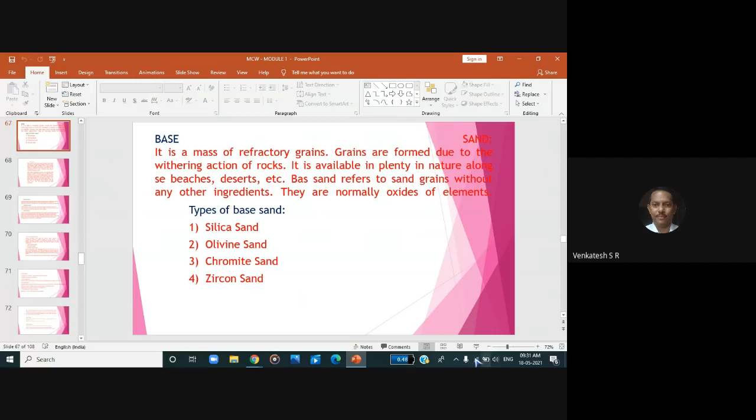See, the riverbed sand, if you add clay and moisture, meaning water, to the riverbed sand, then it becomes green sand. Next, dry sand: as the sand directly coming from the riverbed, that's called dry sand.

Next, no bake sand mold. All of you have heard of phenol formaldehyde, a chemical solution supplied by the Foseco company, the only company throughout the world that supplies this phenol formaldehyde solution.

If you add the phenol formaldehyde solution to the dry sand, it becomes no bake sand. After mixing the solution with the sand, apply it in the mold box and make the mold within 2 or 3 minutes, otherwise the sand becomes just like a rock. In a few minutes, the sand particles bond together and form a rock-like structure; if you touch it with bare fingers, you feel like touching rock.

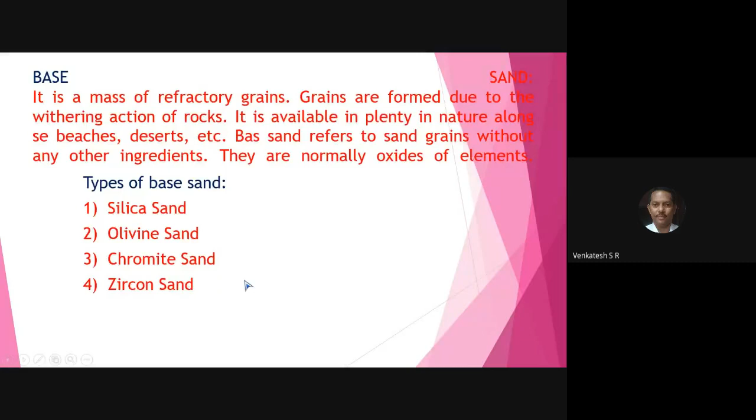Once again write down the title, types of base sand, underline it, put a colon. Below that write down: number 1, silica sand; number 2, olivine sand; number 3, chromite sand; number 4, zircon sand. This is the explanation for silica sand, olivine sand, chromite sand, and zircon sand.

Next, come to the point: how many types of sand molds are available? Write down types of sand molds, underline it, put a colon. Below that write down: number 1, green sand mold; number 2, dry sand mold; number 3, no bake sand mold.

The green sand mold, as observed in the explanation, contains silica sand, clay, and water. If required, additives and binders are added to the green sand.

Next, advantages of green sand: the cost is less, it's suitable for ferrous and non-ferrous castings, strength is high, you can produce a large number of castings, and you can produce thin and intricate shapes.

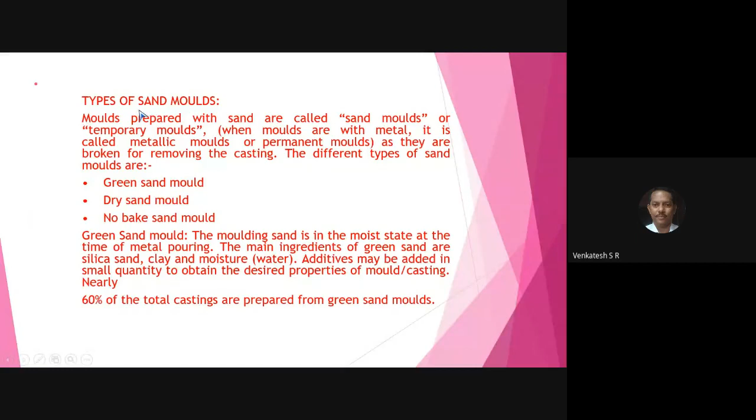Remember, the green sand mold is directly produced from silica sand, clay, and moisture. But the dry sand mold is placed inside the furnace for about 6 to 12 hours at 200 to 300 degrees centigrade. The advantage is the dry sand mold is stronger than the green sand mold.

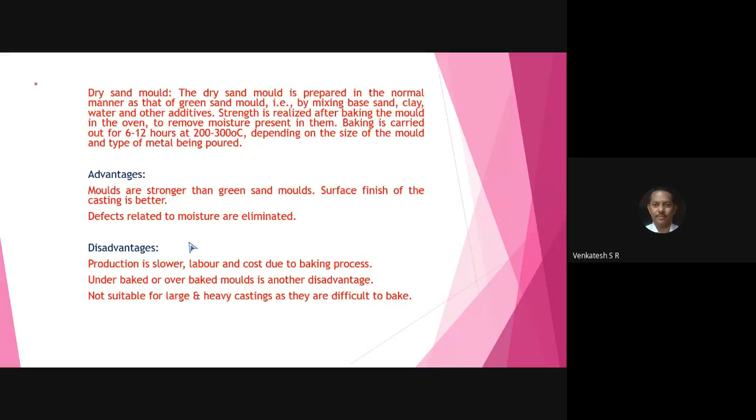Next, the no bake sand molds. 'No bake' means heating the mold in the furnace is not required. Usually a binder resin type is added to the sand.

That is called the hardener, which is phenol formaldehyde solution. All of you please write down 'no bake sand molds' and underline it. After that, write 'hardener', put a hyphen, and write 'phenol formaldehyde solution' as the hardener.

No bake sands are produced using base sand, binder, hardener, and catalyst. All of you write down: first hardener, binder, catalyst, and base sand.

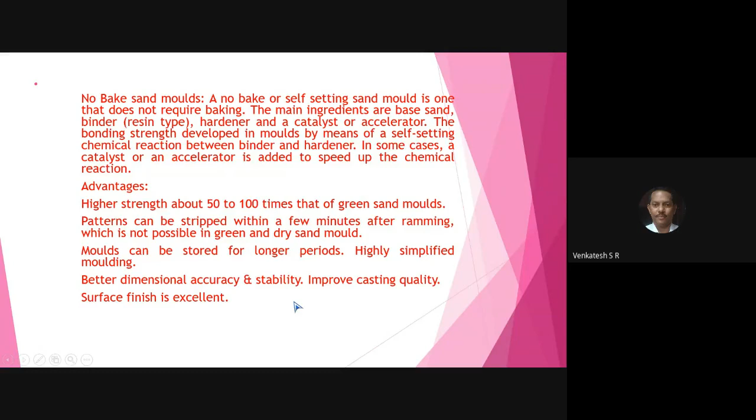The disadvantages: first, once you open the container of chemicals, you have to use it within half an hour, otherwise it becomes hard. Next, the phenol formaldehyde solution is very costly.

Just imagine, 1 liter of phenol formaldehyde solution costs 1,200 rupees. And it produces some odor and gas. If it is mixed with the sand, a reaction takes place producing gases and odor, which is dangerous to the operator or the man who makes the mold.

Sometimes breaking of the mold takes place. If you keep the mold for a longer period, cracks will appear. That is the brittleness usually present in no bake sand molds.

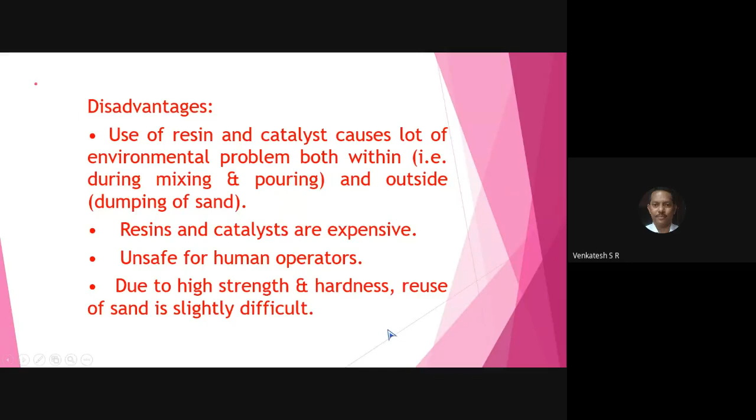Next, molding sand mixture ingredients for different sand mixtures. The ingredients used for the green sand mixture are base sand and binder, bentonite. Bentonite is nothing but clay.

All of you write down bentonite, in bracket write clay binder. Usually the clay binder is added to the green sand with a percentage of 6 to 12%. Write down: bentonite 6 to 12%, plus water 3 to 5%.

Plus remaining green sand. And sometimes next write down additives. The additives are usually used in green sand mold: coal, silica flour, the fine powder of silica flour.

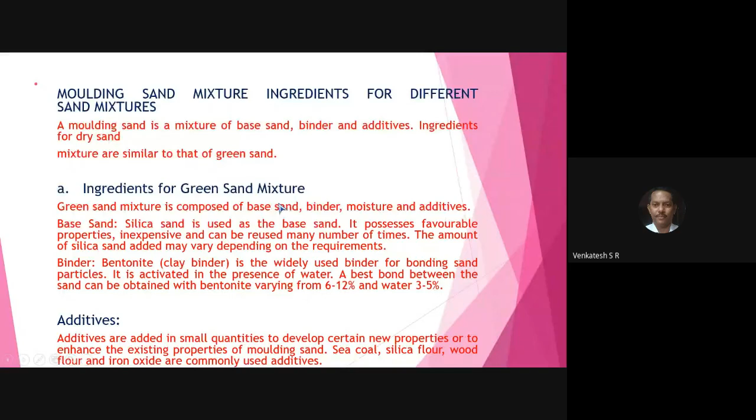For that, make subdivision A, write the title 'Ingredients for green sand mixture'. Next, write number subdivision B, 'Ingredients for no bake sand mixture'.

Underline that. First write down base sand, colon, silica sand, plus sodium silicate binder.

The alkyd binder system consists of 3 parts. At the top write down binder, underline that. The alkyd binder system consists of 3 parts. Below that write down Part A binder, put a hyphen, sodium silicate.

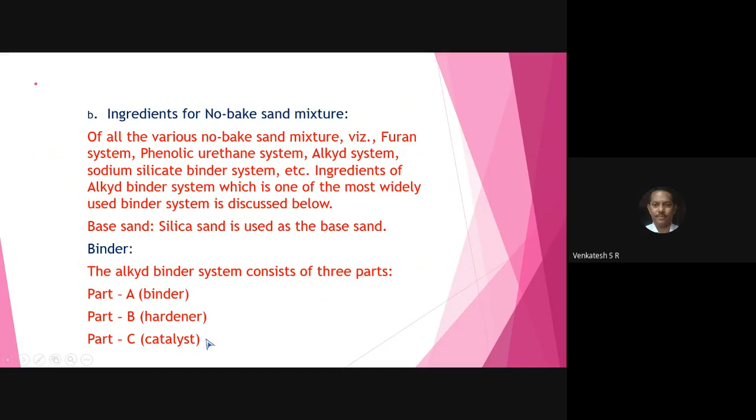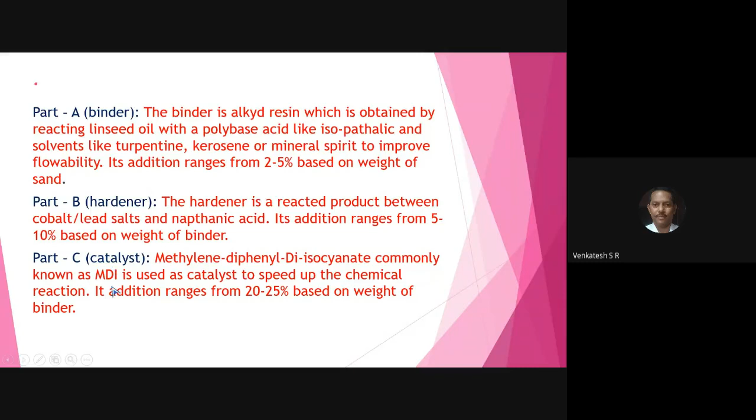Next, come to the point. All of you write down methods used for sand molding, or you can write down different types of sand molding. Write down methods used for sand molding, and underline that.

First, write down bench molding. The name itself indicates bench. In our college foundry, we carry out the mold making process on the bench, made from a concrete slab at a height of 2 to 2.5 feet, with a slab of 2 feet by 5 feet length. On that, they carry out the molding process - that is called bench molding.

Next, floor molding. The molding process is carried out on the floor. The name itself indicates the process is carried out on the floor - it is called floor molding.

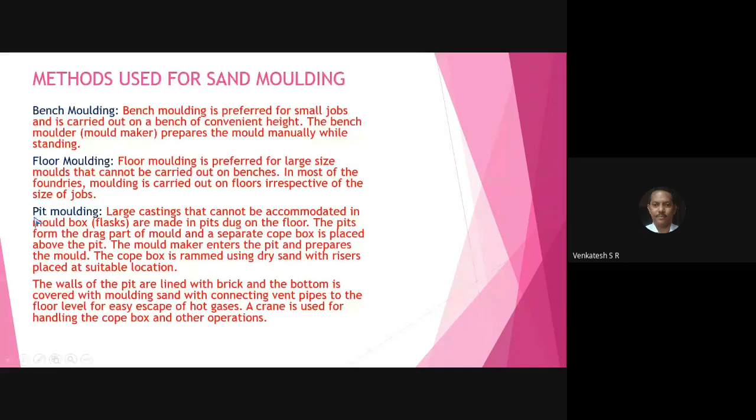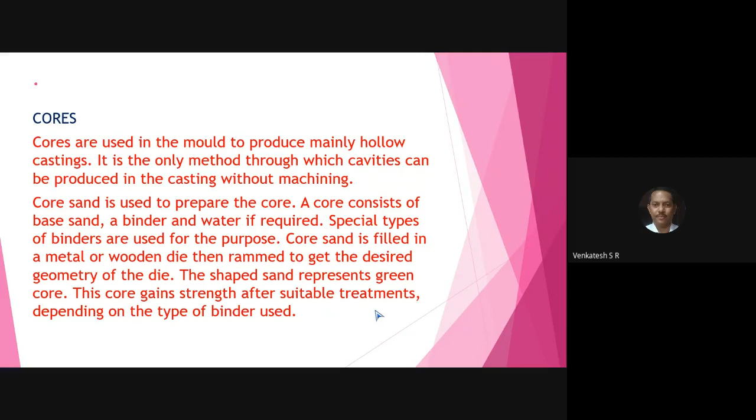Next, core. Suppose if you need a hole in the casting, the cores are produced. The cores may be produced by using a core shooting machine, or you can prepare the core by hand - that is called manually. All of you see the chalk piece - the same type of cores are produced, and at the bottom they use a washer type of core seat or core print. They keep the core print in the exact position inside the mold cavity by using a nail - a steel nail. By using the nail, they place the core print in exactly the perfect position, and after that they fix the cores.

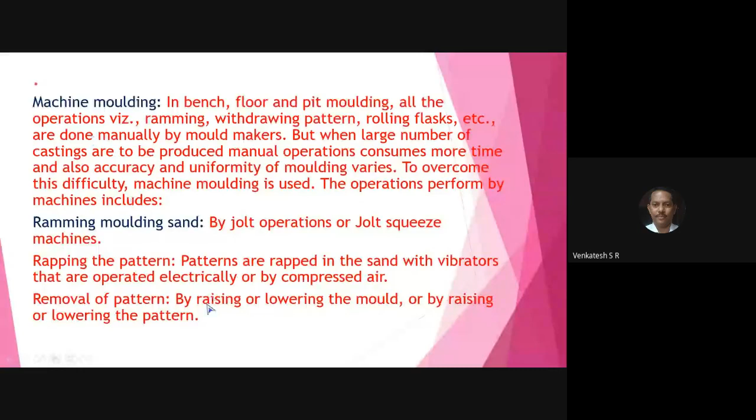Next, come to the point. All of you write down cores. I think you finished machine molding. After that, write down cores - write down the title cores. Next, you write down types of cores.

Types of cores. Underline that. Types of cores are broadly classified into two: green sand core and dry sand core.

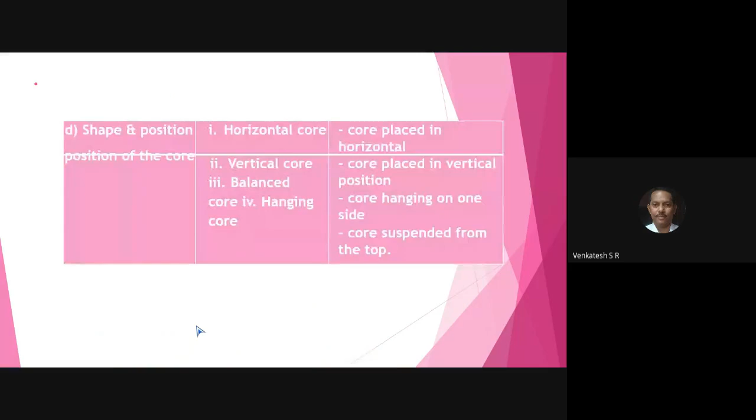The cores are also classified based on other criteria: condition of the core, binder used (resin like phenol formaldehyde solution or sodium silicate, or sometimes oil for bonding the sand particles), and hardening process, such as the carbon dioxide process. These are the condition of the core, that is green sand core, dry sand core, and the type of binder used and hardening process.

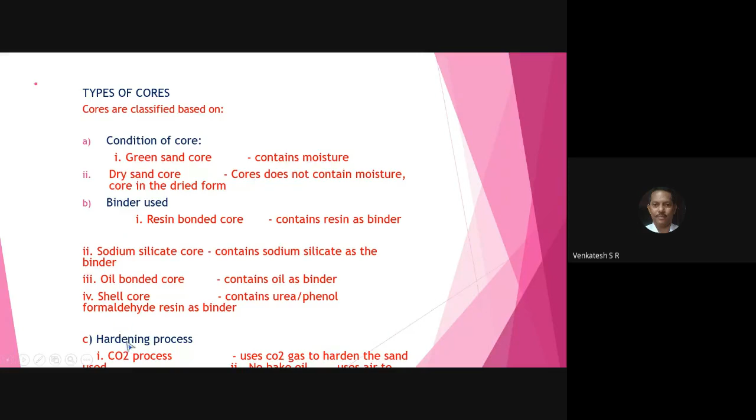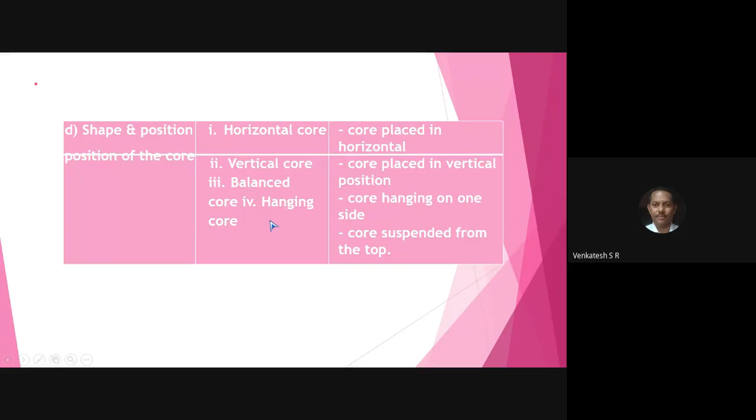Next, the shape and position of the core. You may place the core inside the mold cavity in horizontal direction, vertical direction, sometimes balanced position in the mold cavity, or as a hanging core. This is very much essential for producing a hole in the casting.

Next, dry sand core. Similar to the Portland cement used in construction, the same type of cement is available for making dry sand core. Sometimes sodium silicate, linseed oil, mineral oil, and natural resins are used for making dry sand core.

Next, write down the binder used and hardening process used for making the core. If you write this much, it is enough for the examination.

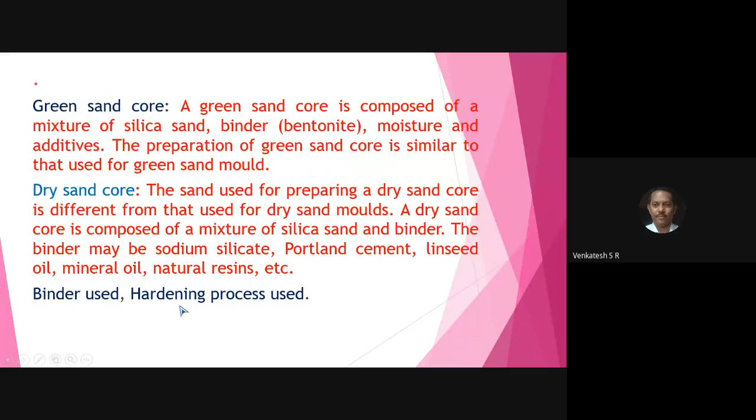Next, if you place the core in horizontal position, that is called horizontal core. If you place the core in vertical direction, that is called vertical core. Sometimes if you place the core in the parting line, that is called balanced core.

Next, the hanging core: usually using steel wires, they place the core inside the mold cavity by hanging it from the top, that is called hanging core. Next, many other types of core.

This is the drop core. The name itself indicates the core which is dropped inside the mold cavity. And the kiss core - if you need more holes in the casting, they use kiss cores.

Next, ram up core. This produces a hole in the casting. The sand is rammed inside the mold cavity for making the hole in the casting. That's called ram up core.

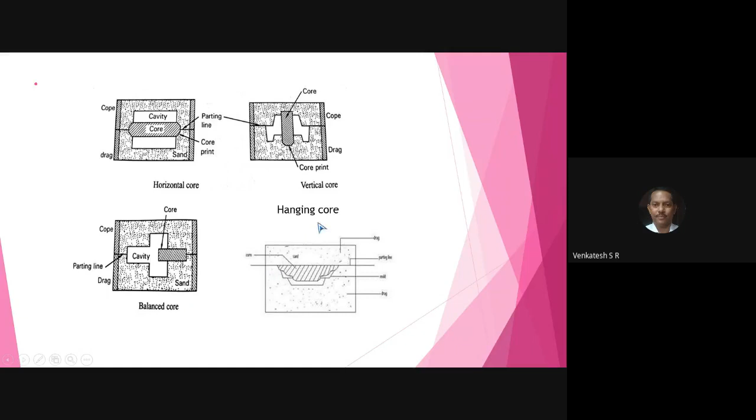So suppose you have this question in the examination to write any four: maybe horizontal core, vertical core, balanced core, hanging core, drop core, kiss core, and ram up core. If you write any four, that is enough for 5 marks.

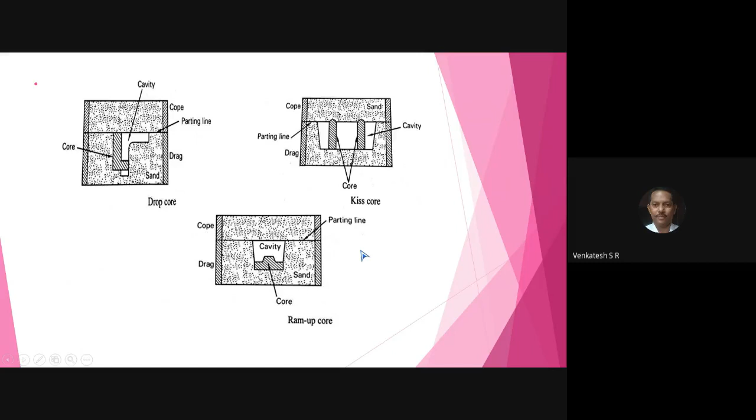Next, method of making core. How do you make the core? All of you write down: method of making cores. Core making consists of the following 4 steps. Write down one by one.

Number 1, core sand preparation. Number 2, core making. Number 3, core baking. Number 4, core finishing.

First step, core sand preparation. The core may be prepared by using dry sand. Add clay, water, and additives and a binder, and prepare the sand. Then depending on the shape of the hole required - it may be a square hole or circular hole - prepare the core accordingly.

Next, the core box. How do you produce the core, whether it may be circular, square, or any other shape? This is the jolt squeezing machine, as explained earlier, used for making of the mold box.

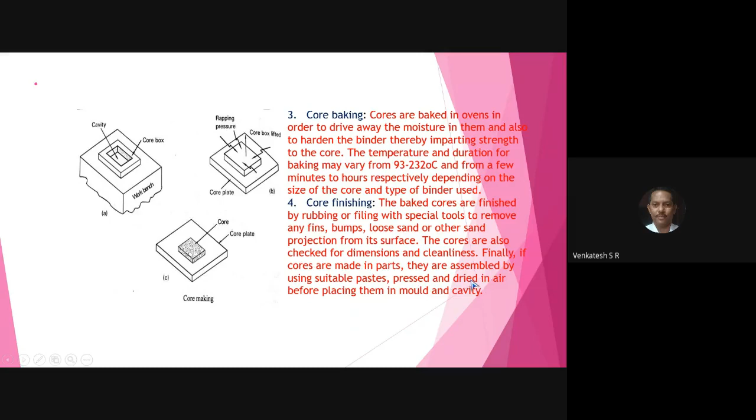Next, afterwards, paint the core with paint or clay. Any projected or unwanted sand particles present on the core should be removed using core finishing, by chiseling or filing, to remove unwanted sand or projections present in the core. After that, the cores are dried in the air before placing them inside the mold cavity.

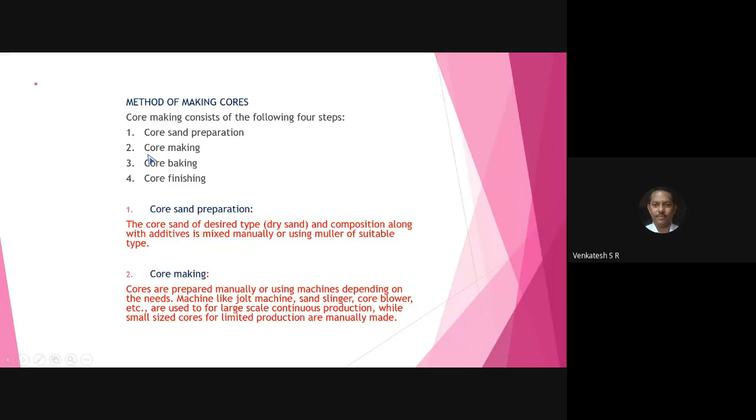Now write down the 4 steps of method of making cores: core sand preparation, core making, core baking, core finishing. You have the explanation here for core baking and core finishing. Next, come to the point.

Gating system. All of you write down gating system. Take a screenshot or write down the rough diagram.